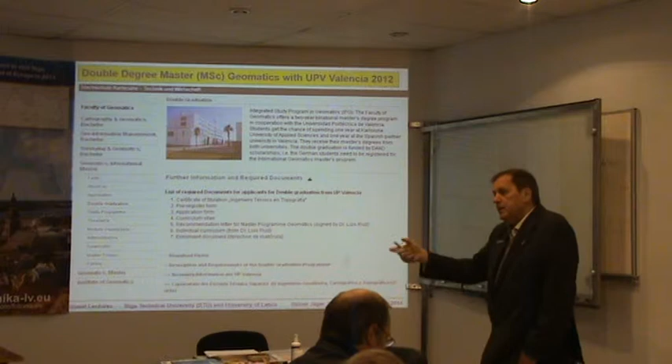This is about our double degree with Valencia. That means if you do our master program and you want to learn Spanish and spend 1 year in Spain, you can spend 1 year in our university and then go to Spain. Spain can come to us, vice versa. So it's very interesting for young students to study in two parts of Europe. So in the modules in the first semester, all different disciplines are brought together. We also accept civil engineers, for example, and then they get a focus on geodetic and GIS and geoinformatic fields in the first semester, and in the second semester the specializations already start.

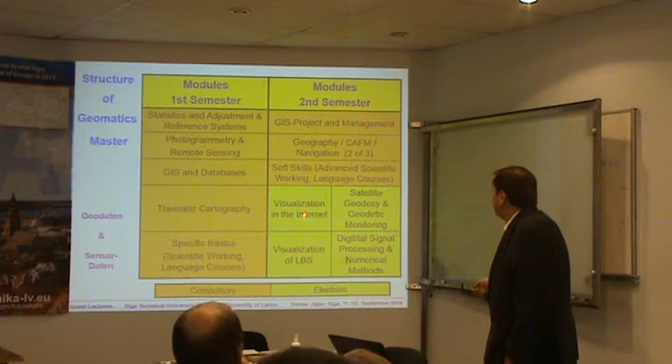These are obligatory modules, and these are different modules related to satellite geodesy, digital image processing, signal processing, numerical methods, and directed to GIS specialization. You can already do specializations in the second semester, as well as in the third semester. Satellite image analysis, thematic visualization, geostatistics, physical geodesy, adjustment, mathematical geodesy, photogrammetry and engineering geodesy are the elective modules, and these are the basic modules which you have to take. You see again, navigation technologies and mobile GIS is a theoretical part as well as a practical part. The students learn to program applications in navigation, and the fourth semester is the master thesis.

So, now I will give some introduction by 3 to 4 slides on our research program, our research projects. The first one is MOLDPOS, a European Union project, which is dealing with geodetic infrastructures for positioning services, and which is already finished, but we continue our activities in geodetic infrastructure for GNSS positioning services, because positioning services are coming up more and more and are also globally used.

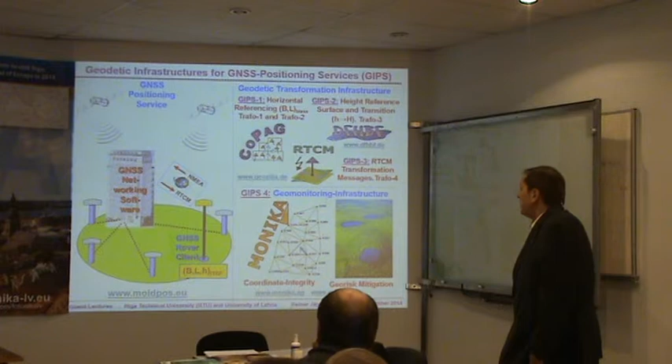The classical geodetic positioning service works by terrestrial reference stations, which produce correction data and send the correction data via the world standard RTCM to local positioning rovers, and then you get the position in the frame which is defined by the coordinates of these reference stations. This is presently the standard.

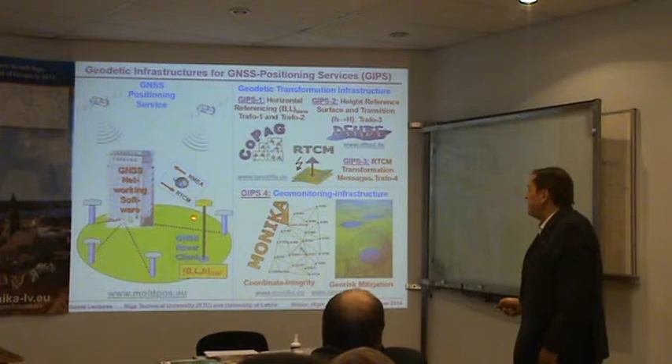The development is going in another direction as well, parallel to this, namely to positioning by so-called state-space products. That means you do not send observation corrections anymore; you send by the internet to the users precise orbit, precise ionosphere model, precise troposphere model at a high update rate, so that you can directly make absolute positioning. This of course requires that you model a little bit more complicated.

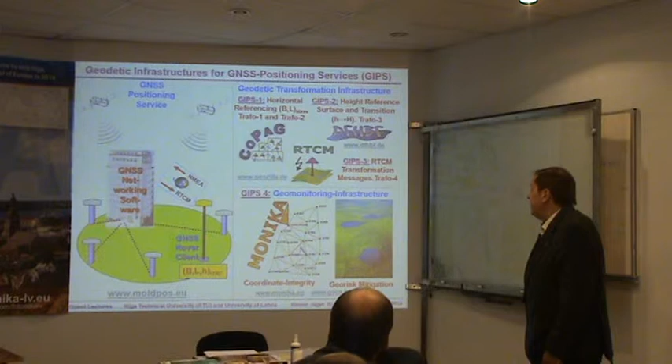We have to consider then relativistic effects on the rover side, Sagnac effect on the satellite side. You have to consider the satellite clock and the rover clock synchronization. That means you have to consider the Earth tides modeling. But this trend is to be seen.

But it doesn't matter if you go to relative positioning or to absolute positioning. Absolute positioning is now in the range of 1 to 3 decimeters, relative positioning already at centimeter level, but they are in a competition, so to say. But what you need always are geodetic infrastructures.

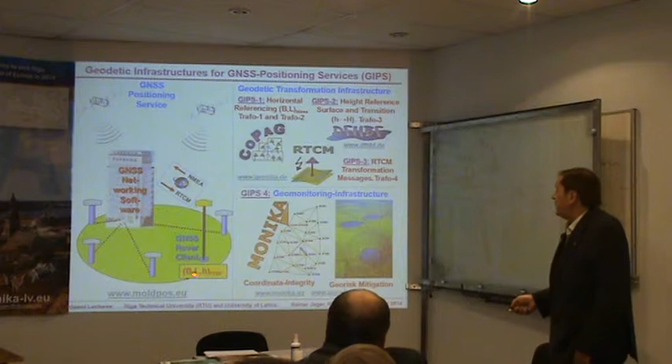That means if you have got the position on the world, there are some different coordinate frames for the user which you have to make accessible based on this position. The first thing is the geoid. You do not want to have the height over the ellipsoid, you want to have the height over sea level, and therefore you need a geoid computation. This is the topic of today.

You also need to transform the position in different ways. The first thing is that you have to transform it from the present position on the Earth back to your frozen plate. For example, in Europe, our common frame is European Terrestrial Reference Frame 89. This is a frozen plate of Europe from the year 89. And from 89 to now, we have in Karlsruhe, depending on the location, about 80 centimeters of plate rotation.

So if you want to have a precise position and you get an ITRF position, then you have to first rotate back to the old plate state, and then transform your position, if needed, into the national network, which can be different from the ITRF network. The classical networks are still active and still needed, and this is geodetic infrastructure part 1, to go to the still active classical networks with or without a plate rotation in advance.

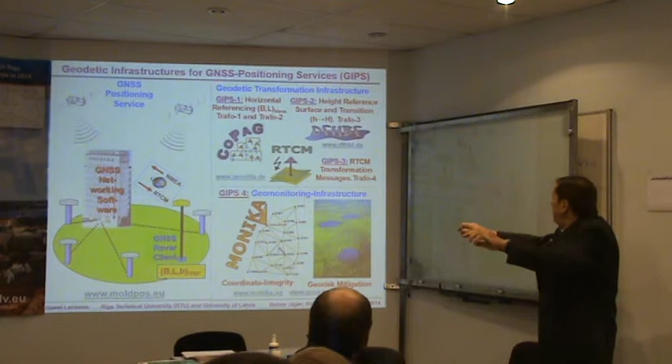The second one, I already told it, is a transformation from the ellipsoidal height to the physical height. And the third one is to provide these datum transformations in the horizontal and vertical position by a communication infrastructure, which is RTCM. At present there is a worldwide standard called NTRIP client, which can set up transformation messages and send them to the rover, so that the rover can directly have this position.

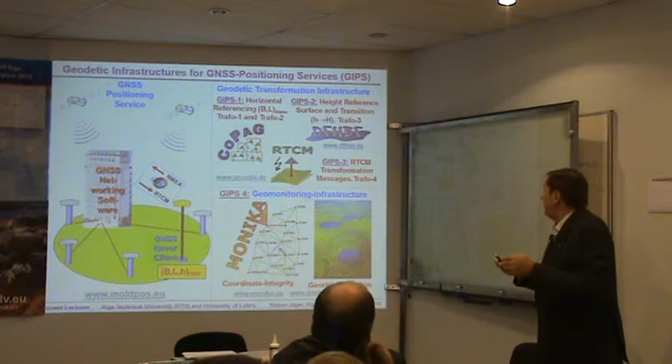We have also developed RTCM messages. I was involved in the international group to set up the new RTCM standard and the transformation messages. This was my task as scientific leader of this industry consortium some 5 years ago, but now it's standard. You can have these RTCM transformation messages through the internet based on the messages which are generated by the service.

The last topic is also necessary if you replace your million trigonometric points in a country by a few stations. You have to monitor the stations to be sure that there is no sudden movement due to some sabotage or some geodynamic movement. So the services are monitoring their station positions round the clock, and here we also do developments. MONIKA is a reference station monitoring software which can also be used for the detection of geodynamic events and to georisk mitigation. This is the first topic, geodetic infrastructures for GNSS services.

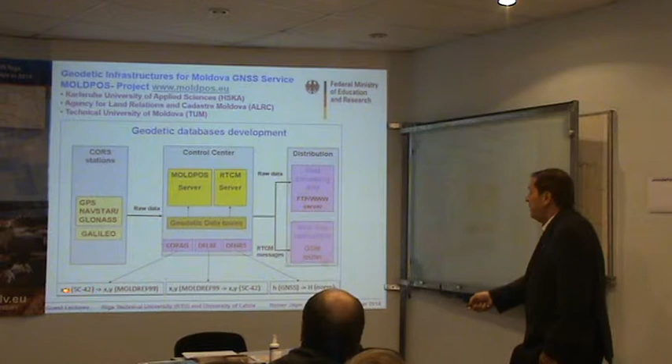Here you see what we have developed for Moldavia. We are computing transformation parameter databases. We are computing geoid models, and then this can be set up in a transformation message and sent to the user, for example, to transform the position in the Moldavian reference system to the old Soviet system SK42, or to transform the height from GNSS to the normal height. Normal heights are also relevant here in Latvia and the European standard.

That means we are computing local transformation parameters which are made continuous along the mesh borders, so that you have overall a continuous transformation. This is one of our developments which we have done.

And another topic where I will speak today at University of Latvia is the computation of height reference surfaces. We started with a non-physical approach where we just set up the height reference surface, the geoid, as a continuous polynomial surface. Typically in small meshes, 10 by 10 kilometer meshes, with a third order polynomial.

And this is this part, a finite element polynomial surface made continuous by continuity equations along the border, and this parameterization is then computed from identical points, from points which have height over the ellipsoid and height over sea level. The difference is just the surface.

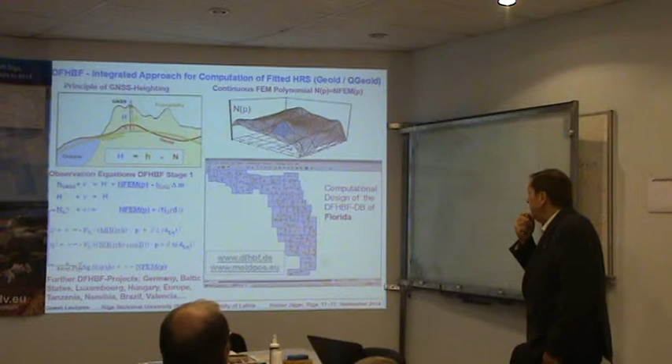It is of course not possible to relate gravity measurements to a polynomial surface. Here you must have, of course, the gravity field as a modeling part. While vertical deflections can be derived from a physical point of view as well as from the geometrical point of view, so they fit here, but gravity does not fit.

So we have changed our approach to a physical approach. And this is what I will talk about today at the University of Latvia. You see it has 4 components.

The first thing is that we have global geopotential models, and if you want to make a precise geoid, you have to have a resolution of degree and order about 7,200, and that means we have 50 million unknowns. So it is not possible to make a computation very comfortably. So what we are doing is to map the global spherical harmonics to spherical cap harmonics.

Spherical cap harmonics are, so to say, the general case of global harmonics, where the pole is the north pole. In the spherical cap harmonics, you have a regional pole, and you can squeeze the whole Earth to a cap, and then you can save unknowns. That means you can model the local gravity field completely in a part of the world.

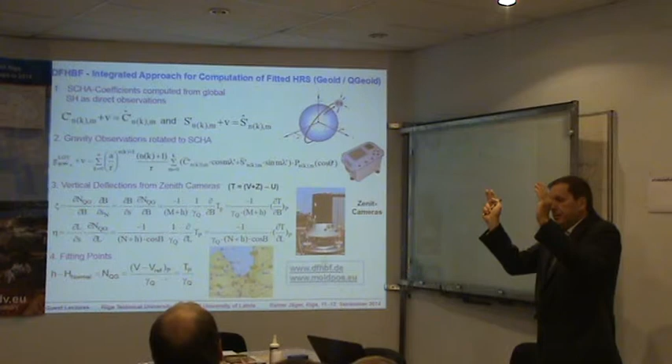And that is what we are doing. We span up a local cap, and then we map at first by our own algorithmic scheme the global spherical harmonic coefficients to the local ones, so that we have only some thousand unknowns instead of many millions. And in an integrated approach, we introduce these coefficients as basic gravity field modeling. They get corrections, residuals. We make a least squares adjustment, least squares estimation.

And then that means the global gravity field defines the first part of the local gravity field, but of course with some residuals, and if you want also with some extensions to higher order. The gravity observations can then be related to these spherical cap harmonic coefficients in this way, that we compute the parameters CNM and SNM here from gravity values.

This is the observation, this is a parametric space, and this is a generalized Legendre polynomial, with non-integer n, k is integer. So this is coming from the spherical cap harmonics theory.

We can now also relate our vertical deflections, which are measured by zenith cameras, to the physical representation of the gravity field in spherical harmonics. You see the change of the geoid height in the direction to north is the vertical deflection to north, ξ, and the change of the geoid in the direction to east is the eastern vertical deflection component.

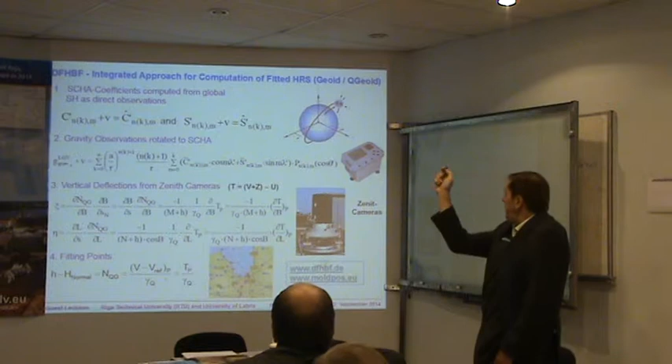So if we want to derive this, we can apply the chain rule, dN by dB times dB by dn. This part is known. This is related to the curvature of the ellipsoid in northern direction. This is the curvature of the ellipsoid in eastern direction, and then we have to make the differentiation of the geoid, and the geoid is following the theory of Molodensky, a Russian colleague from the last century.

To be derived. So you have to derive the so-called disturbance potential in the direction of B, and the disturbance potential in the direction of L. And the disturbance potential is a function of the gravity potential of the Earth minus the reference potential of the Earth. The reference potential of the Earth is a GRS-80 potential, and so you have here the difference between the true potential parameterized by these coefficients and the reference potential, which you have to derive in the latitude of the

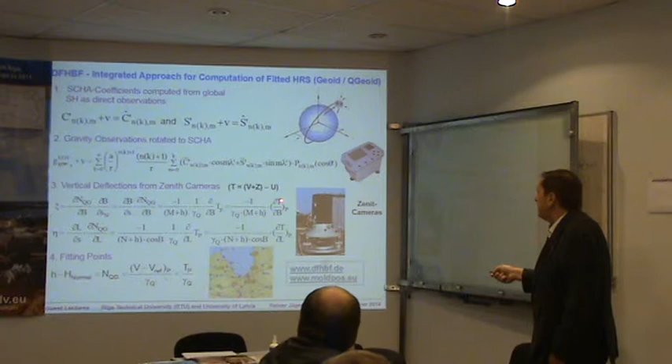ellipsoid. So you have, of course, not a parameterization in the latitude of the ellipsoid, so you have again to apply in several parts the chain rule. So you have rather long expressions, but the theory is complete. At the moment, we have implemented this part, but we have not implemented in our software this vertical deflection part. We always do software developments. So this is something where another PhD candidate has to mind, this part, as well as other questions.

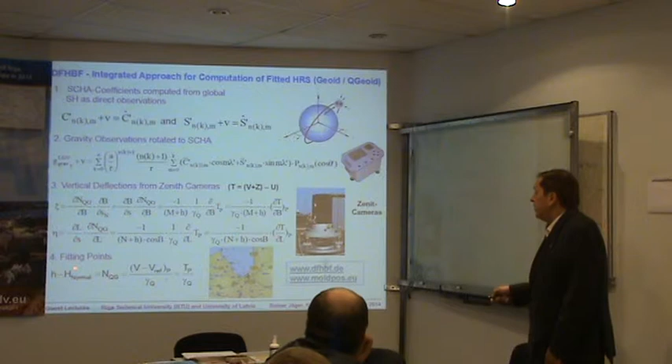So the fitting points are already implemented. That means the fitting points are these points where the surface should go through. The difference between the ellipsoidal height of the point and the normal height of a fitting point defines the quasi-geoid, and following the theory of Molodensky, this is just the Molodensky way to compute normal heights which are related to the quasi-geoid. So you have again the parameterization of the disturbance potential as a difference between the true potential and the reference potential, which is on the right side.

So what we are doing is not geoid computation or gravity field computation which is uncontrolled. If you perhaps know the theory of Stokes, if you compute the Stokes integral by gravity measurements, we have no control what happens. You just integrate and get at the local position by the integral all over the world, so to say, or model with the Stokes function, the gravity anomalies. But if the gravity anomalies are wrong, partly you will not really detect the errors.

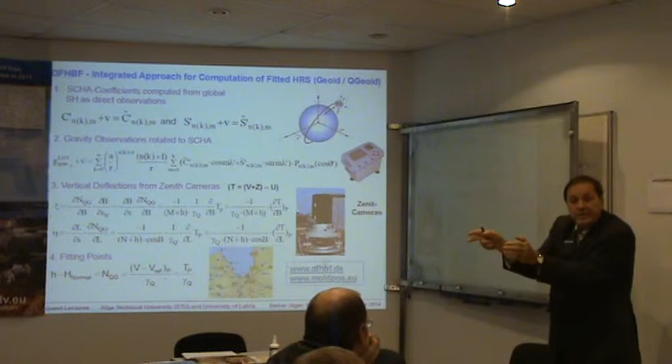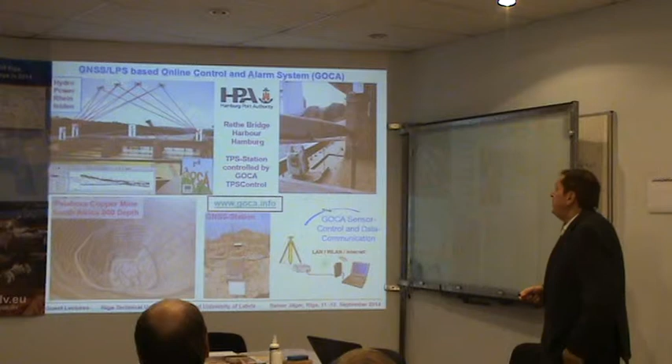What we are also doing worldwide is geomonitoring. That means we have developed a system which uses GPS receivers and total stations. This is a monitoring of a bridge in the harbor of Hamburg. And you see again, we use the data to produce three-dimensional positions of the moving points, and we then control the movement of the points by Kalman filtering processes and by displacement estimation.

And here we have projects worldwide. This is one project in South Africa. This is one project in the east of Germany. We also have projects in Russia. We have a Russian cooperation partner. We have now a Polish cooperation partner, and we have now new cooperation partners in Vietnam. So we are also global players in geomonitoring. The thing is that we sell the software, and the local dealers sell their instruments and their service to install the whole thing. So it's a win-win relation on geomonitoring. This is another research topic, because the models for the monitoring are part of our research.

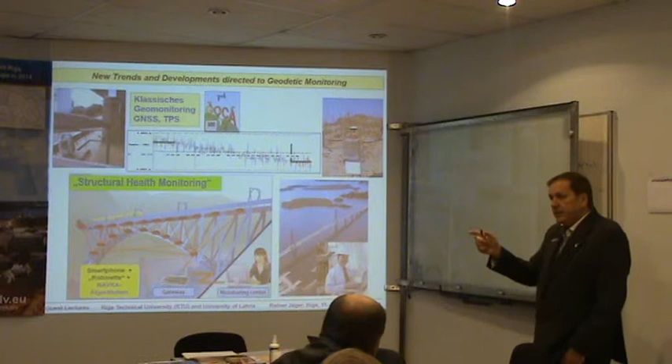What we are also doing is, instead of using classical sensors like total stations or GPS, to use navigation algorithms to set up local monitoring boxes where we integrate GNSS as well as inertial navigation sensors. And we do not make here a classical Kalman filtering. We are doing another estimation, Gauss-Markov model estimation, and algorithms where we can introduce restrictions.

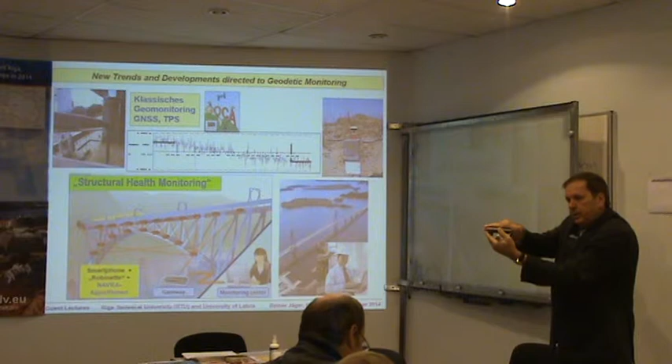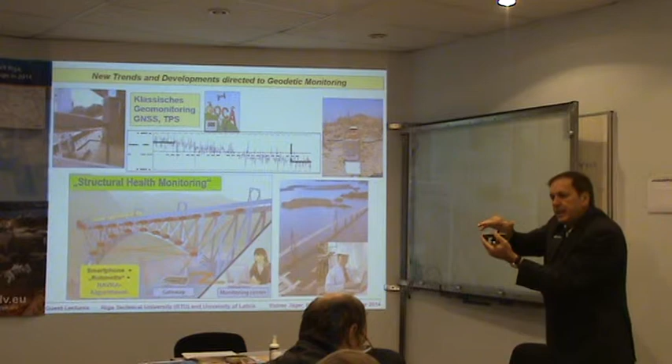If you put such a navigation box onto a bridge or something like this, you can of course say the bridge will never incline too much, so you can give a limit to the movement of roll, pitch and yaw. And you can also say the movement of a bridge will not be 5 meters, otherwise you will not need monitoring anymore. And then you can also put some inequations on the position, and then these boxes get self-calibrating. Then in opposite to a normal inertial navigation system, which is drifting away very fast, there is a stabilization, and so we can make monitoring by using navigation algorithms.

So this is MONICA, another project. MONICA is something for monitoring large-scale reference station networks. Our software is installed in our state as well as in Austria. Austria is also monitored by MONICA.

MONICA is a software which permanently computes the state of a geodetic network on a large scale. It also corrects for plate rotations to find out internal deformations. This is also another research project at our university. And the last one is again physically and mathematically based.

We are developing algorithms for precise outdoor-indoor navigation for people, vehicles and goods, and georeferencing with distributed sensors and platforms. That means we always compute the full navigation state vector, which is more than positioning: it consists of position, velocity, attitude, acceleration, rotation rates of a body, and some sensor calibration parameters. This is the classical navigation state vector.

What we are doing, in contrast to classical navigation, is that we always try to make a deep or at least a tight coupling with GNSS in favor of this navigation state vector, and we make a deep coupling of gyroscope data, accelerometers, magnetometers, camera data, barometers. So we have again redundancy on such boxes, and our topic is to make the algorithms.

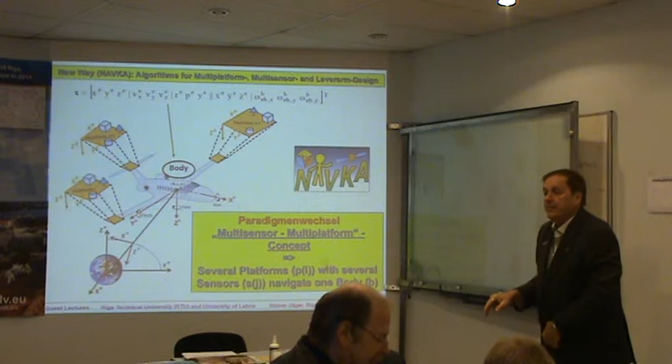That means, imagine you have a car where many sensors are in for automatic braking, for stabilization. These are also accelerometers, and you can imagine you put your smartphone into a slot and combine these sensors with your smartphone sensors, and the smartphone computes. And therefore you have different placements of your sensors, and you have lever arms. That means the position of the sensor needs some corrections with respect to the measurements and the body movement.

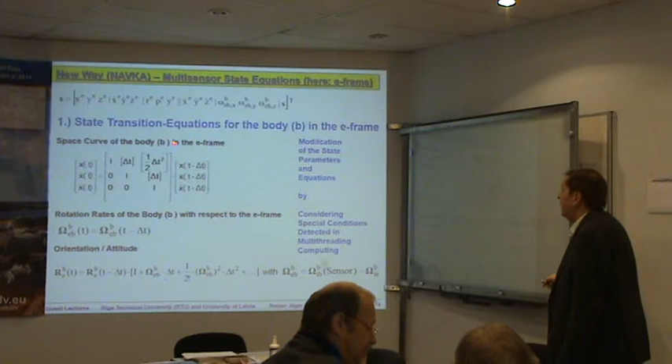So, if you are familiar with inertial navigation, you see that the first part of inertial navigation, or of our navigation, is to have a nice prediction model for the state vector from the old state to the new state. And here we have this prediction model in the permanent parameter estimation: the prediction of the new position, of the new velocity, of the new acceleration.

We assume that for a short moment the rotation rate of the body is constant, and then we can update the old attitude to the new attitude by this Taylor series of an exponential function, which is a solution of a differential equation. So this is our state prediction.

And now our observations look like this in a distributed constellation. You have a platform somewhere on the body, or in the special case, the body is the platform itself. And the platform is translated, the platform is rotated against the body. So you have to consider these so-called lever arms. You know where you screw the platform, so you know these parameters.

On the platform which you develop, you have different sensors which have a translation with respect to the platform frame, and which have different orientations with respect to taking the observation. So if you think of an accelerometer sensor,

the single acceleration of each accelerometer on each platform is just a scalar product of the orientation of this accelerometer measurement unit with the acceleration in the platform frame. So this is what you measure if you relate all to the platform frame. The platform frame has to be rotated from the platform frame to the earth frame by using the attitude matrix.

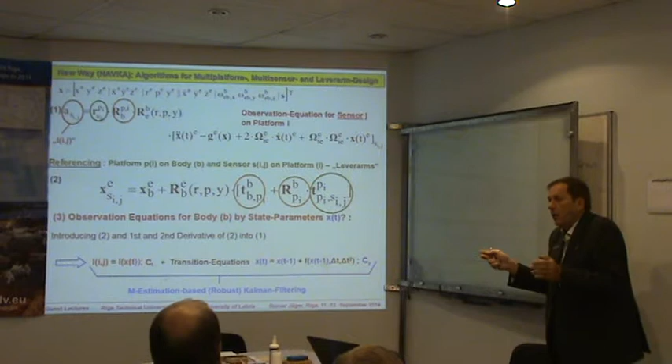And in older times, the lever arms were kept very small. And we say we do not like this, because we now have the age of MEMS sensors. Sensors can be distributed with very large lever arms. So it's also interesting to use these lever arms as information content. Because if you, for example, have one sensor here and one sensor here, and you move the body, the accelerometers also give information on the rotation. So the sensors become self-calibrating and support each other. So we have redesigned the classical navigation algorithms in the last 3 years and are now successfully producing products.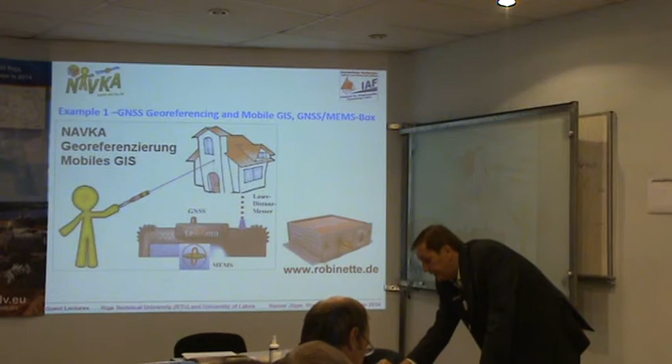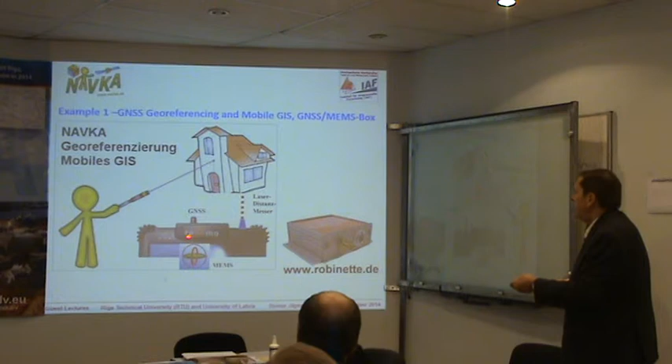Another thing we are doing is to use the navigation state to make surveying easier. So you can imagine if you have a small device to which you attach a laser distance measurement, and you have the position from GNSS, and the orientation from the other sensors, then you can make a 3-dimensional polar computation of coordinates and allow surveying for everybody. And we have developed this also for the industry, again for this company Texmo, which uses a ruggedized tablet PC with a GNSS on board, with a helix antenna, about 5 centimeters only, but for ordinary surveying objects it is enough, and laser distance measurement to capture the coordinates.

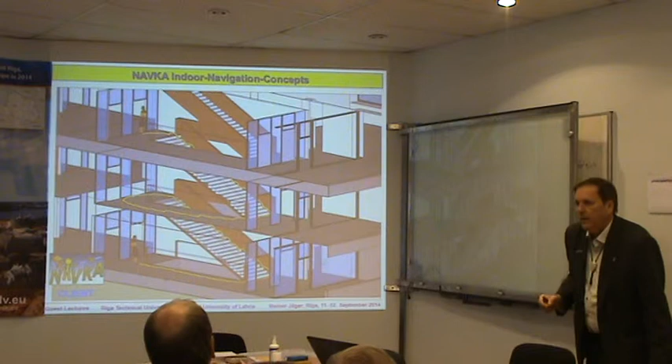What we are also doing is indoor navigation, again using inertial navigation, because indoors you cannot use GNSS. And what we are doing here is to navigate the foot of a body, because if you have only inertial navigation, fused with barometers and magnetometers, those are critical in buildings, so you can forget them. Normally you cannot use them, so we can just put together accelerometers and gyroscopes with some redundancy inside, because they are very cheap, and we can also fuse barometers, but then we would still have a high drift. So we say, okay, we model the foot, we make a small foot sensor for professional security, for police, for firemen, for anti-terror commandos, task forces, or something like this. This is our first development, which is already working. And I can also show you some videos.

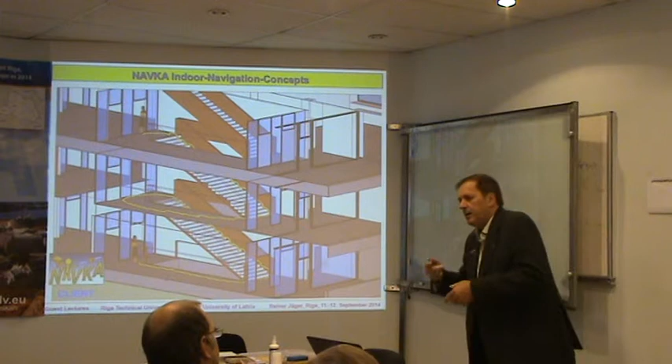The trick is that if we find out in parallel computing that the foot is on the ground, we can say there is no rotation rate, no velocity, no acceleration, the position is fixed, and the attitude is also fixed. Then self-calibration becomes active. And then if it continues, the full navigation state vector is determined again, and so we can survive for about 10 minutes in a building without a big drift. So drift is then smaller than 1 meter after 10 minutes, and then we need position information again.

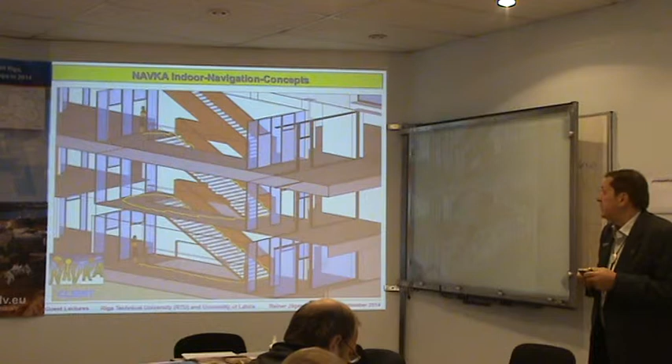The position information comes from the server at the moment in georeferenced buildings. That means the user has his present position and the building in 3D on his smartphone, and then he gets the information. If you enter this, you find a control point, he gets a red point, and then confirms, and then the position is actualized. So this works, but we also think about other solutions. I will show you what we are doing.

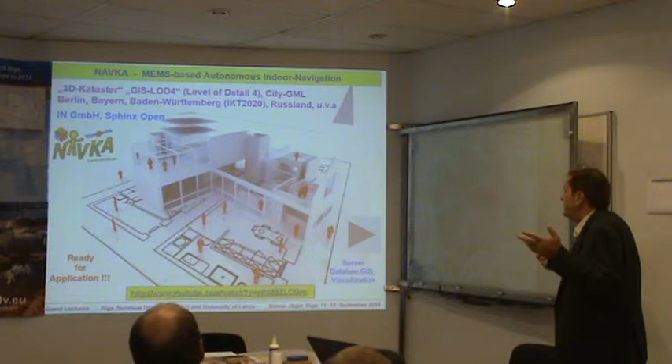And so this is the server from this company where we are cooperating. We have developed the smartphone client, and they offer this service for police, for fire, and also for visitors walking through buildings. If you have a Chinese group visiting your factory and you don't want to have them spying, then it's better to see where they're walking. They get then a small shoe sensor and walk around, and this is the intention of this business.

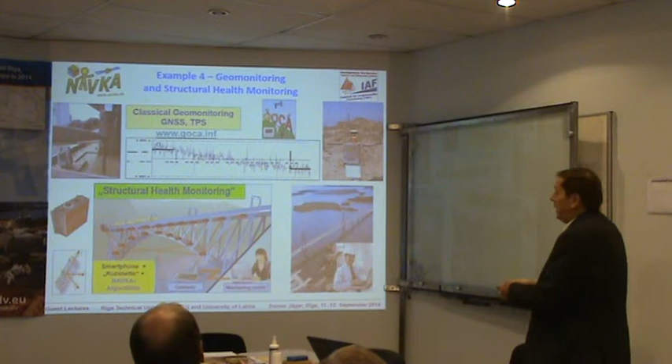I already told you that we are using the same algorithms for structural health monitoring, for high frequent monitoring of buildings, and you can also have this presentation. All presentations are here, as well as this presentation. And you find a lot of links on this project NAVKA, but now some videos of our developments. I will leave the PowerPoint presentation and go to some video. I hope it will work here.

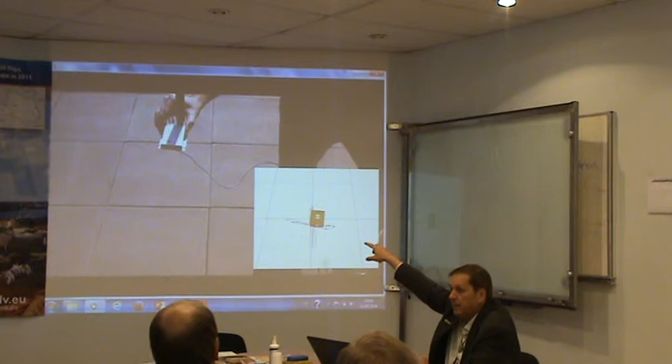And this is a commercial product which we are also selling. This is our firmware on the box, but we also enable the user to get down the raw data and make own modeling. So you can also have a so-called evaluation kit for own development. And our indoor navigation.

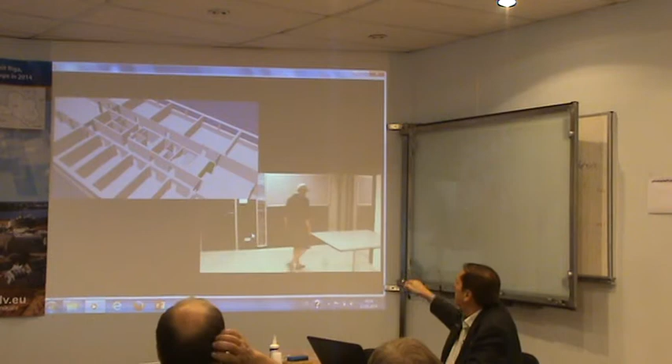But this is not an optimal solution because he carries a smartphone at the shoe and not a shoe sensor, no? But it works. And so on.

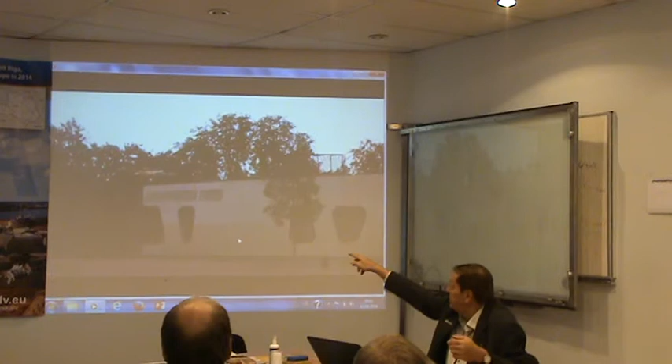And this is our flight control development. We have different drones. We have a small drone. You see, this is just a very ruggedized drone. If it falls down, nothing is really happening. So this is our basic drone for daily use, for testing. And this video is 1 year old or so.

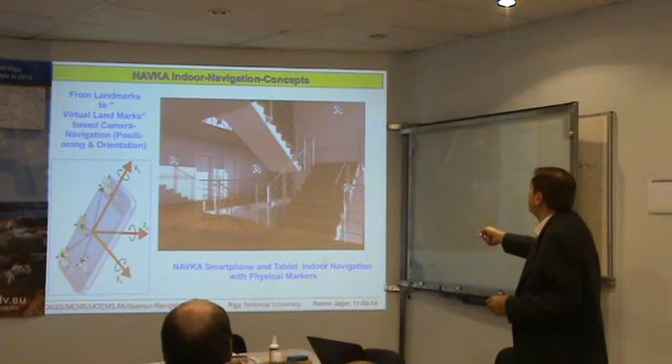So we have developed software also for smartphones which is working with real markers very well. But in buildings you don't want to have real markers because they don't look very nice. And then what we are doing is to say, if we have in future georeferenced buildings, you just have to use the building 3D model and rotate it to the earth frame, then you have absolute georeferencing.

If you then use photogrammetric software and detect some corners in the building, and have the building model, then you can say, okay, this corner is the corner of my building model, and I have coordinates. So you do not need physical markers any more. You can use virtual landmarks. So you also have absolute position in buildings.

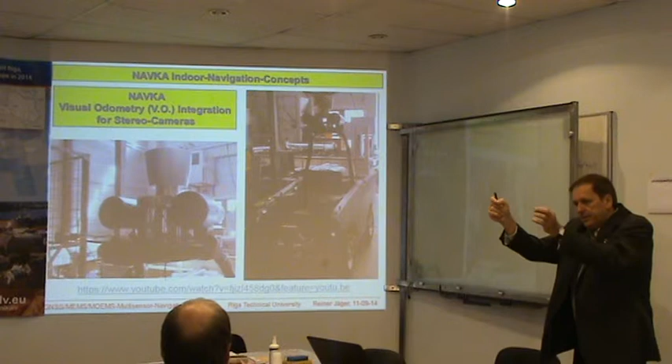And what we are also doing together with the Fraunhofer Institute, this is one master thesis running at the Fraunhofer Institute for automatic navigation of this robotic car. You see a GNSS receiver here, and you see a stereo camera. And the stereo camera is taking permanent images and determines the change of the position and the velocity of this stereo camera, which is somewhere on the body, in respect to the environment. This is called visual odometry.

And there is open source software available at the KIT. And what we are doing is to take this open source software and to make a deep integration, a deep coupling to the rest of the data. And this works very well. So you have again the velocity from visual odometry, and you have this lever arm.

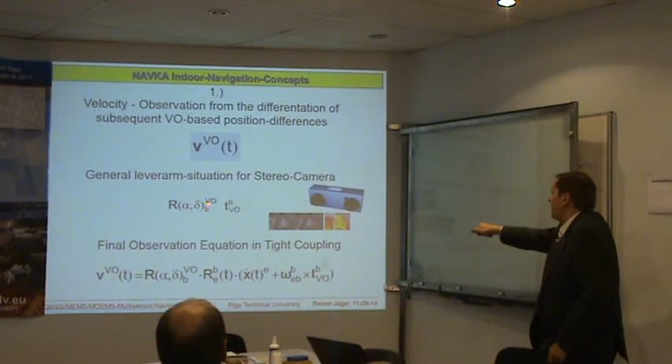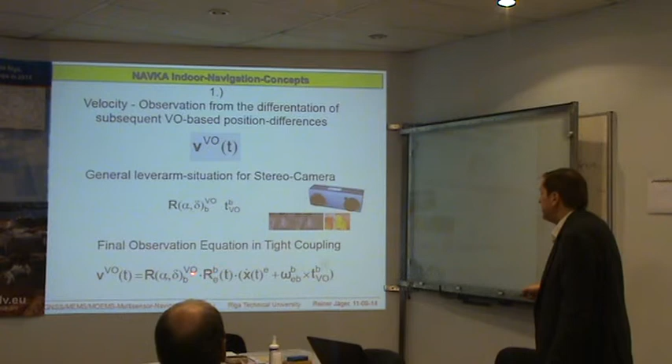The camera is sitting somewhere on the object and it's rotated in respect to the body frame. So this is an observation equation for your observation in relation to the velocity of the vehicle. And this is this lever arm, and this is the orientation attitude matrix, and this is a known orientation.

So if you put 3 stereo cameras on, you can fully determine the 3-dimensional vector of the velocity, and you can also determine the rotation rate by exploiting the subsequent orientation of the objects from stereo images. And then you have 2 full observations related to the navigation state vector if you consider the lever arms.

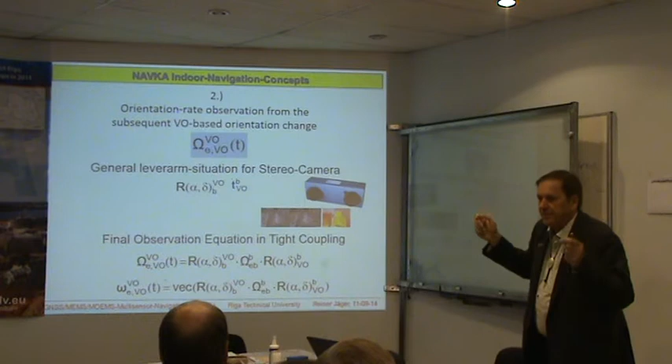So KIT, they are not geodesists, they did not consider the lever arms, they also don't know deep integration, they are more informatics people. And also the Fraunhofer Institute, they have some physics, but they also forgot or did not apply deep integration. That's what we are doing.

And so we have already developed for indoor, this is a room, a deep integration of a stereo camera together with inertial navigation. So you can see that in a room, instead of GPS, you can use the velocity and the rotation rate of this stereo camera. It is a first derivative. That means we also have some drift.

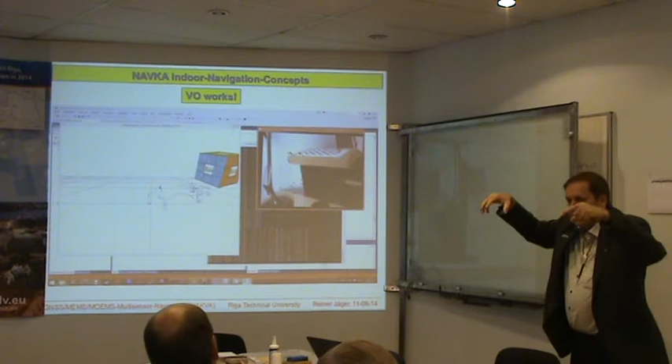We have no absolute position, but the drift is much slower, and you can use outside absolute positions from GNSS, and inside you can use this image processing, detecting by feature detection corners and other objects with coordinates. And if you make a deep integration of all observations, then the system works very stable.

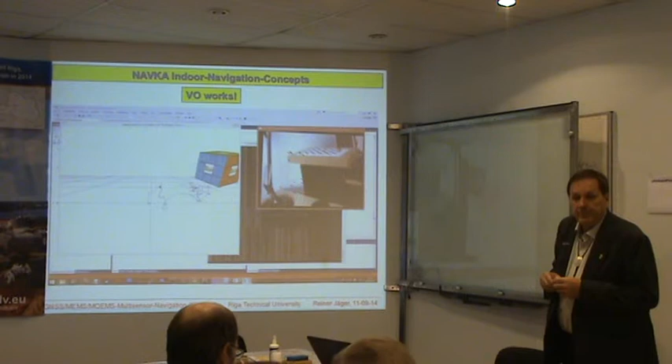So we will also write an article in the next 3-4 weeks, which will be titled somehow "Indoor Navigation is Solved," because we have all components, and now we are looking for industry to build such. But you need to have the reference frame before. It means that you have to have a building. Yes, you are completely right. But you need to have it in your computer, in your database.

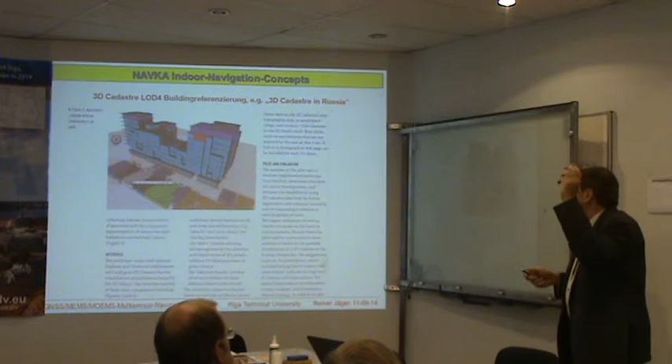Okay, you are completely right, but I will show you two things. The first thing is that georeferencing of important buildings like main stations, theaters, airports, where accidents or terrorism can happen, is a worldwide process. These are level of detail 4 models. That means the Russians are doing this georeferencing of important buildings, but also in our country, Berlin.

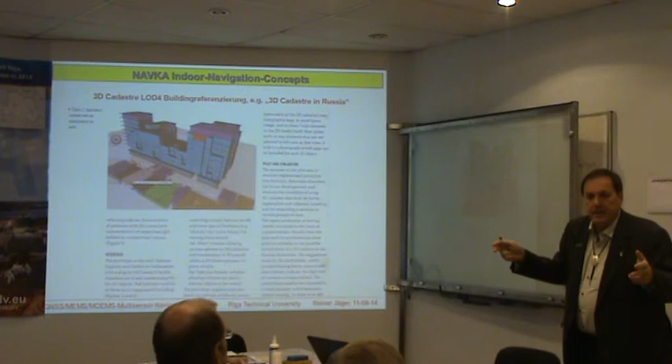The title is Smart Cities, Modern Cities, and Seamless Outdoor-Indoor Navigation. So public buildings are georeferenced. This is also a market. People make the georeferencing and sell the buildings, and the future will be that you enter a building, you get from the service the building model as a database, and then you can navigate inside the building.

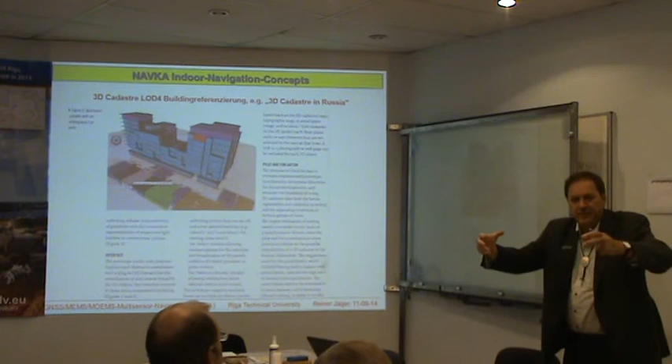So this is obviously a new market: level of detail 4 buildings. And for this visual odometry, if you do not have a georeference of the building and you have sensor integration, you have to estimate the orientation of the building with respect to the Earth-fixed frame. It means that you have additional unknowns. It becomes more unstable, but in our algorithms we have considered that the environment is either not georeferenced yet, or it's georeferenced. It is a switch.

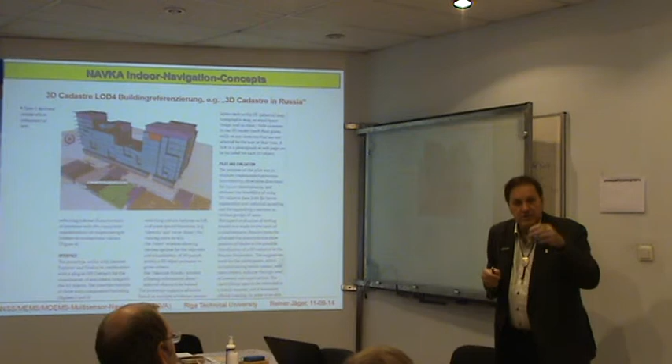But you are right. But we try to be always one step in advance of the others. So I do not have a private company. I only have to pay my assistants. I have 4 people to pay, and we are directly cooperating with the industry. And I forgot to make many patents because of too much work. Patents are also complicated. But for each project you have an agreement with some industry.

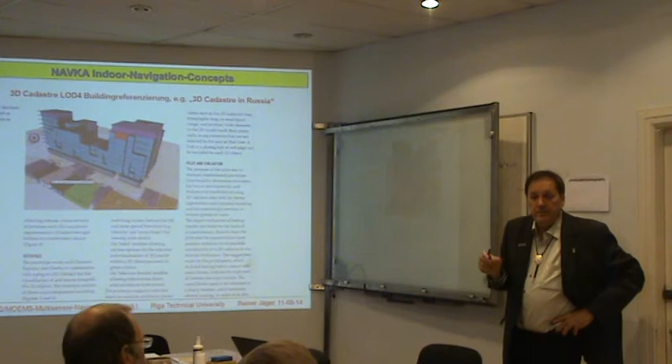Yes. We are selling our algorithms with protected code as libraries. And we also sell it with USB dongles, small dongles, hardware protected. We never give the source code to anybody, because this is our top secret, and it works also in gear monitoring. If we sell gear monitoring software to Russia without a hard key, you can forget it. They say "Spasiba Bolshoi," and then they are away. So you have to have hard key protection, and we sell libraries.

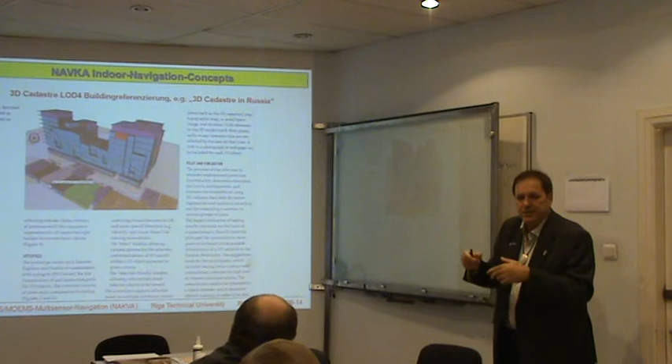The same model is also used by Xsens. Xsens is a Netherlands company which also does similar developments. I believe that we are already better. They have firmware which you can download, which is also protected on the chip. And we also develop firmware. If you go to the website NAVKA, you find firmware downloads, and we make special applications to use the raw data. And the applications are quite different. The modeling for a shoe sensor must be a multi-threading model, and so on. So we have also different application software.

But patents for a university are difficult, because you must have money, you must go to the administration, I have a new patent, and

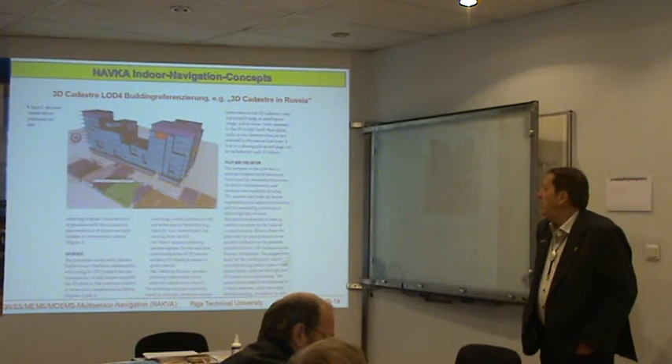Okay. Do you have also some other projects, for example, government? Is that your government? Yes, the funding was by the government. The government funded 90% and the industry only 10%. So they wanted to have progress in satellite navigation. But then you have to agree both, private company and government. Yeah, this is a starting point: to have some papers where it's written that you are developing for the industry.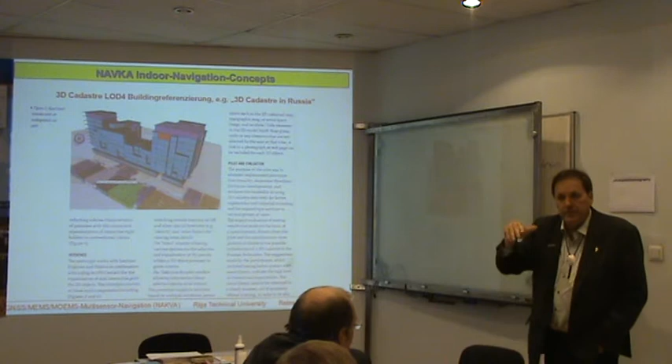You may not go into competition for 1 year after the end of the project. Or if you do something else, for example this Volocopter, we are not allowed to go into competition if they will use the software for 1 year later. But at the moment we make scalable drones, and this is not a competing product. So we make small drones, medium drones, and Mr. Zwiener will tell about it, with a full closed loop of the regulation of the flight.

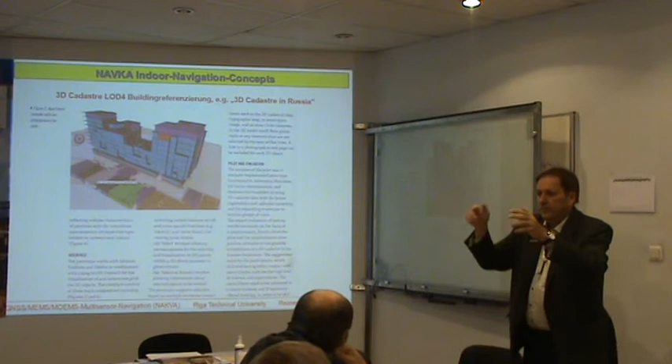If you throw away mass, if you make a fighting drone, you will change the moment of inertia, and then you have to readjust the physical properties of your object and so on. So it's very complicated, these scalable drones, and here's also a big market. So we are waiting for companies. If you have companies who want to develop drones, we have a full flight control, and if you deliver a naked drone, so to say, with a number of propellers, then we can make it fly automatically with joystick, with remote control.

And the same is for geo-monitoring. We have better algorithms than the others. We have no patent on the algorithms, but we sell them because our models are better. But we have to protect the software. This is, of course, very difficult if you make Android software, especially apps and so on. So this also costs a lot of effort to make the software protected.

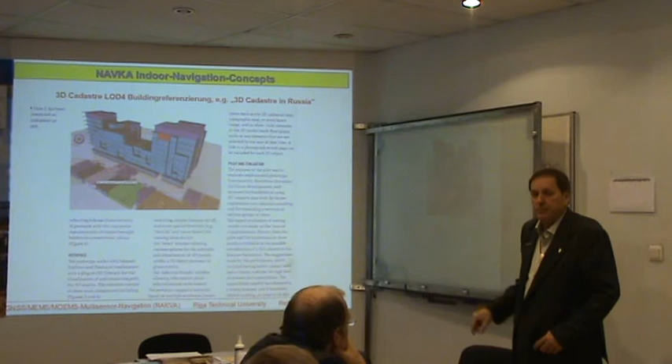But how many people are working in your team? In geo-monitoring there are 2 working. One is doing geo-monitoring, the other one is making algorithms, both for geo-monitoring and for navigation. And in the navigation project there are at the moment 3 people working: 1 on this airborne Volocopter, and 2 on the basic algorithms for the other things. So I have, in principle, 4 assistants. I could have also 10, but I must get the money by myself. So I'm kind of a research junkie, always looking for the next budget.

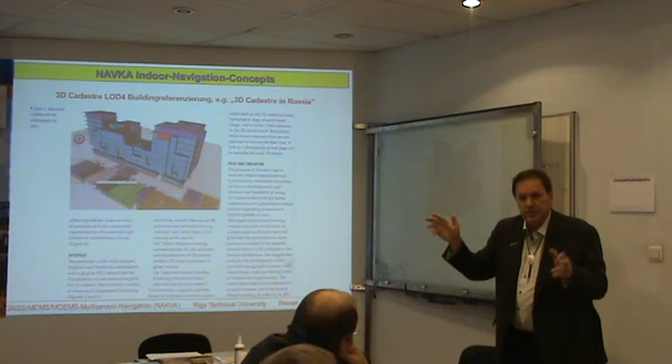So, but it works. So if you have good products, it's not a big problem, but you should not have too many assistants, because you also have some social duties. So if they do a PhD, the money should at least be enough for finishing the PhD. So my optimum is 4, up to 5 assistants.

More are not possible. I don't know the infrastructure at the university here, but in our type of university, the research must be done by external funding. We have only very few permanent research positions. So I must make contracts with industry and so on, and that's why we have to produce whole products.

I cannot say I make only theory. I like theory too, but from the theory I must go to the final realization. Otherwise I am not able to continue, because I cannot pay the assistants. Do you also have some basic funding for research from the government? Then you can

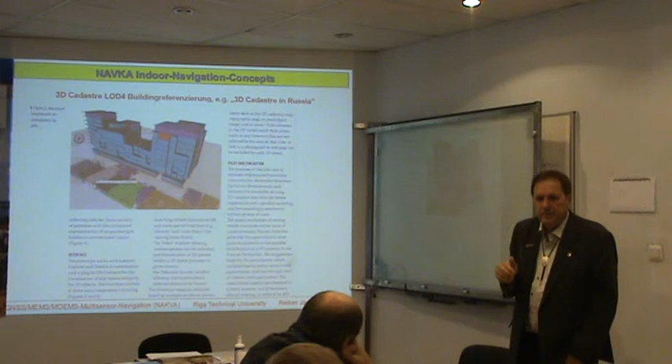A few. I have a half place for a PhD assistant, only 50% permanent, and another 50% research title. So I have one place which is fixed forever, or for the next 10 years or so, due to the present structure. But this is only one of 4. The other 3 I have to pay from the products.

But as a professor of the university, you receive your salary from the university. Yes, my salary, of course, but not the salary for the assistants. But I can sleep quietly because I make yearly contracts, and if the project fails, my university is responsible to pay the assistant until the end of the year. I have to pay it back, but I then have a lot of time to pay it back.

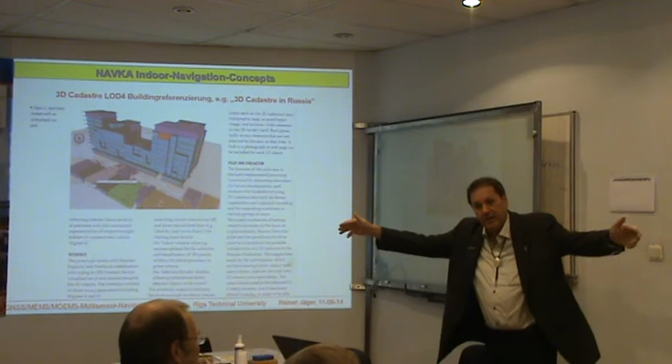So this can happen. If I had a private company, I would have to fire the man or the woman. So they always have a safe position for 1 year, sometimes 2 years, and PhD candidates even for 3 years. But then 3 years are over, and I have to look for the next funding.

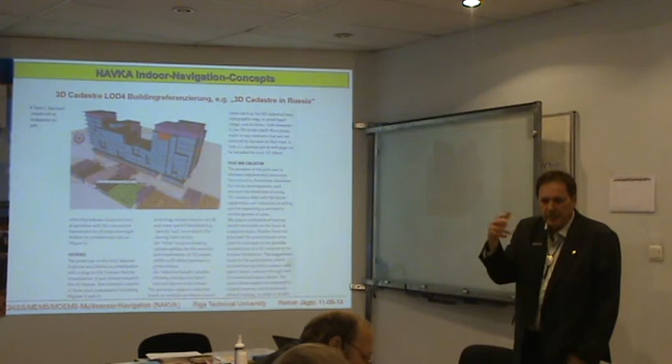At the moment we have won the European satellite competition in Baden-Württemberg. We got first place out of 16. We have beaten other universities and industry here, and so I will also get some money due to this prize, which I won last week with my team. So yeah, that's life.

Life is hard. Yeah, it's one of the hardest.

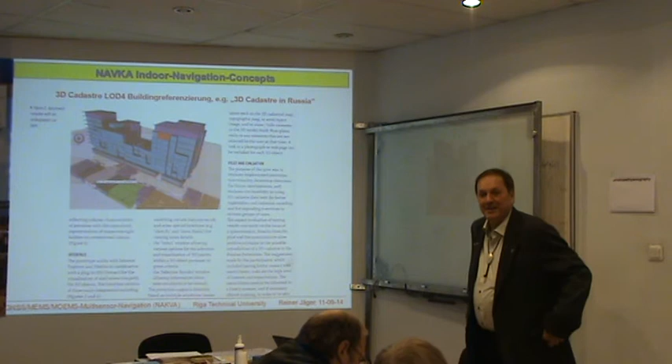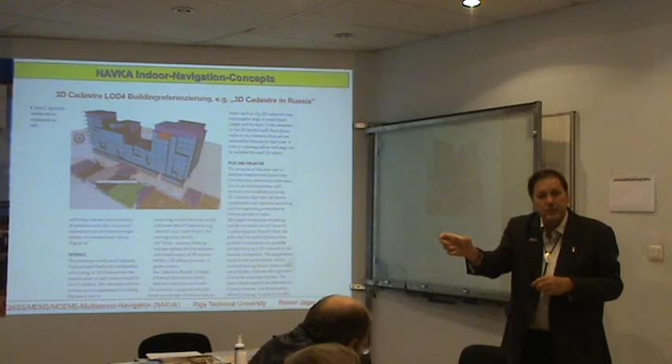Okay. More questions? I have a question. What are the problems that you face in your work? Scientific problems. The scientific challenge is in navigation, for example, that we went away from classical Kalman filtering. We do not do least squares. We approximate the Gauss curve by the Laplace curve, and then we have another estimation principle, minimization of the absolute sum of residuals. And this is also typical for operations research algorithms.

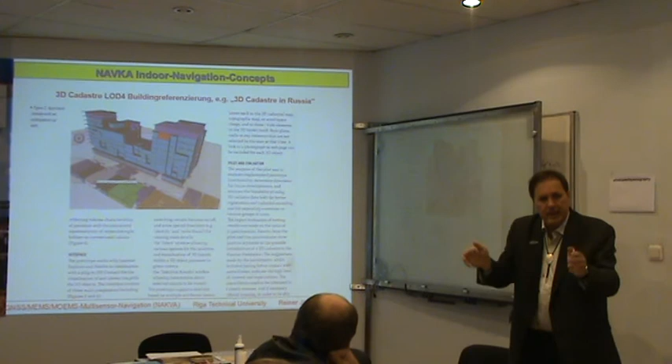And if you go to this algorithmic world, you can then introduce inequations for the parameter space. This is also a big advantage of our algorithm, that we can fix inequations or equations for the unknowns. With ordinary Kalman filtering there is no such possibility. And we do sensor integration based on generalized maximum likelihood estimation, so we can also have other density functions. Perhaps you know particle filtering. We can put different density functions together into one complete maximum likelihood density function and estimate from this.

So we have also redesigned the algorithmic scheme, and otherwise we do sensor fusion. We are not physicists, we are engineers, so we do not have very big challenges there. Of course, we also have to treat physics. If you go to absolute GNSS positioning, we have to model the Earth tides and all these relativistic effects. So what we are doing is, so to say, applied mathematics and applied physics. That is how I would characterize our work.

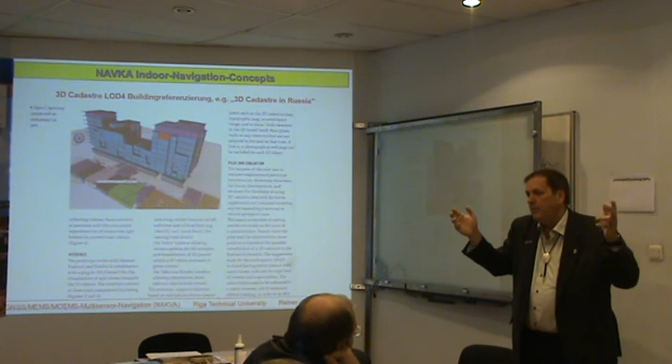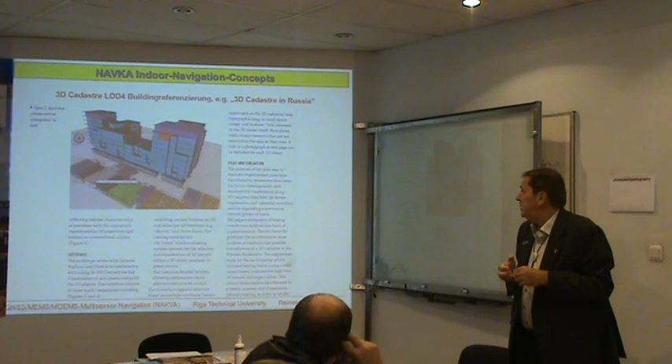Geodesy is our own science, applying this applied mathematics and applied physics to the body of the Earth and neighboring planets. And the challenge is complete redesign. We have beaten the classical design of the algorithms, because the situation has changed, the sensor world has changed. We have very cheap sensors that can be distributed, and there were no algorithms on the market for distributed sensors. So we had to redesign everything and start from zero. But it was a good idea, I think, because we have many requests from industry for this algorithm.